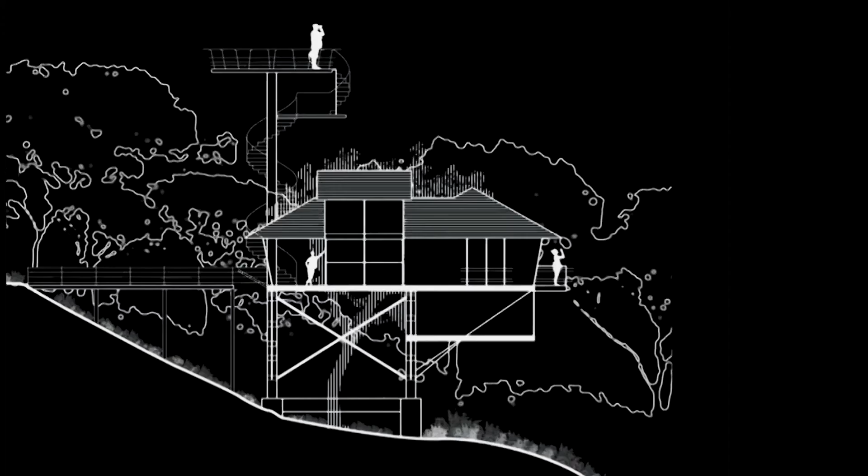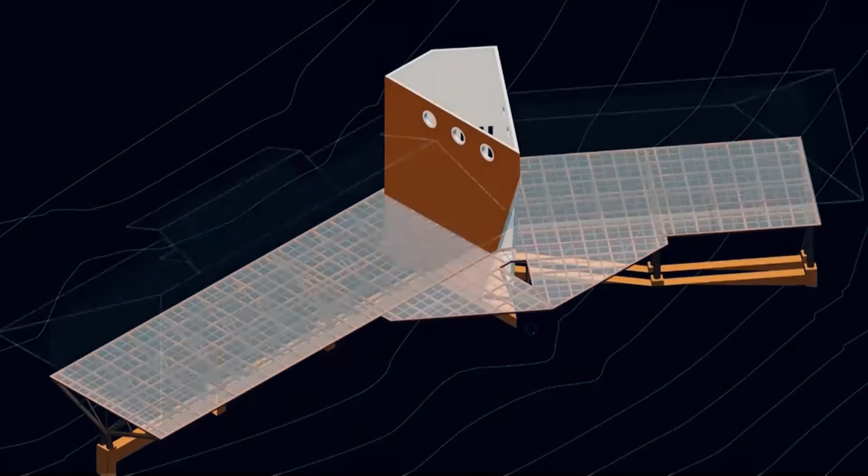What is constant and what is absolute in architecture is that we create spaces. His work has put emphasis on the process more than the outcome, and this process is inspired by the relationship between man and nature. Architect Shabbir Unwala has been practicing architecture and interior design for the last 31 years and went on to establish his own firm called Design Works in 1990. Among his many projects are the Stone House, the Waterfall House, and Machan in Lonavala.

Great. So I call it architecture of the mountains and on the mountains. So that's what I would call my today's subject. So when you're building on a mountain, what are the factors affecting buildings on hills? So you have geological factors, you have climatological factors, and you have natural hazard factors. So these are the three things that start affecting your building.

The geological factors: suppose a mountain is built out of just soil. So what happens? There could be a landslide. And if you follow some news, 15 years back, there was a village that got completely wiped out near Bhaja Caves because there was so much rainfall, and because people cut the trees, the soil becomes loose and then it slides down. In fact, I think around 3 years back, it happened in Kerala also. We had a similar problem. And a few years back, we had the same problem in Kedarnath. So those are the geological factors that start affecting what you build on a mountain, if you're not being careful about it.

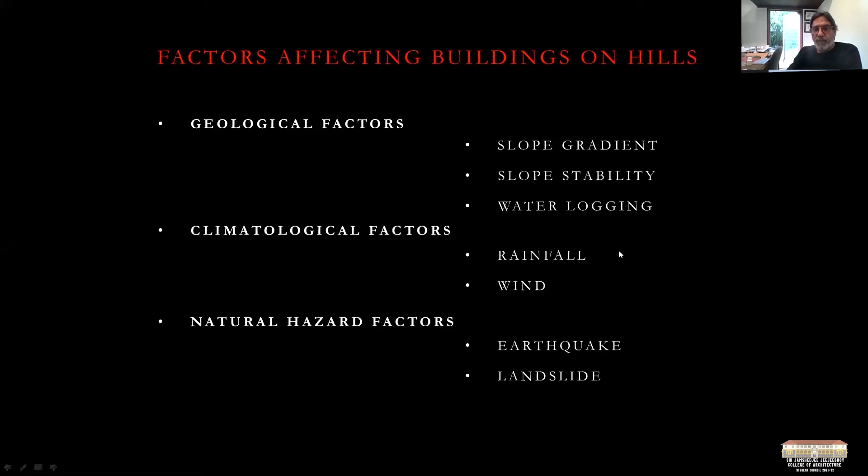Then there are climatological factors and natural hazard factors. So when you say geological factors, there's slope gradient, slope stability, and waterlogging. When you look at climatological factors, rainfall and wind, and natural hazard factors, earthquake and landslide. So these are the factors that start affecting your building. And if you're not being sensitive to it, then nature gives it back to you. And when it gives it back to you, it is really with its full fury that you feel it.

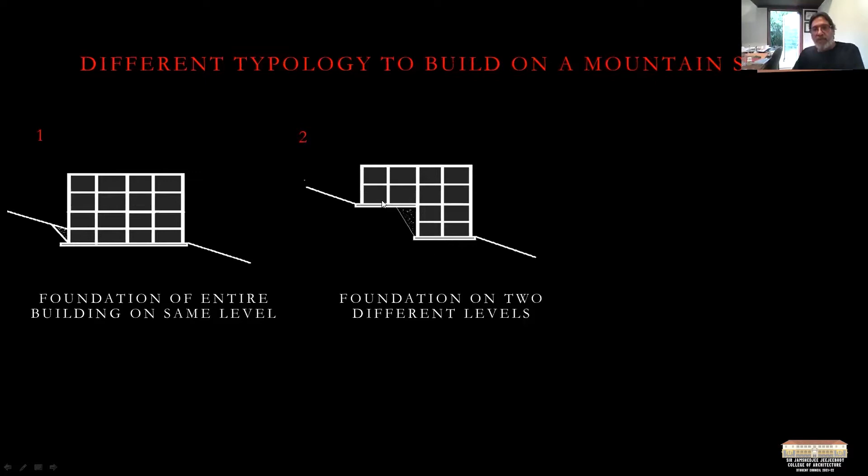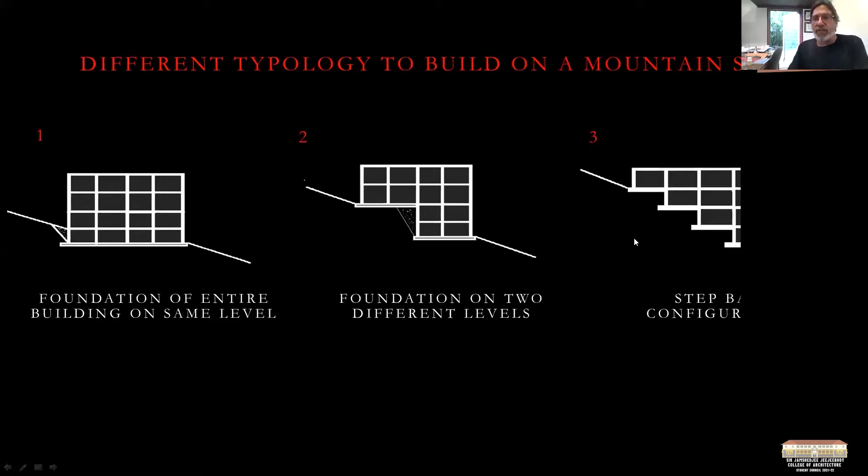There are different typologies built on a mountain slope. Suppose you found the entire building on the same level. Then you start cutting the mountain, make it a flat ground, and then you do your building. Or you can do something like this, where the building is on 2 levels. If your building is much bigger, you start putting it into 2 parts. Or it could be a step back configuration, depending on the gradients, the mountain, and the size of the buildings. So these are the different typologies people follow to build on a mountain.

Number 4 is step back and setback configuration. The other option that a lot of people do is create an artificial platform with retaining walls, and you put a building on it. Or parts of the building supported on stilts. You can see this is all on one level, but you have these very tall stilts that try to bring the building on the same level. It depends also on the functionality. If you need a large open hall on the same level, and you're not able to get it because of the slopes, then you start doing things like this.

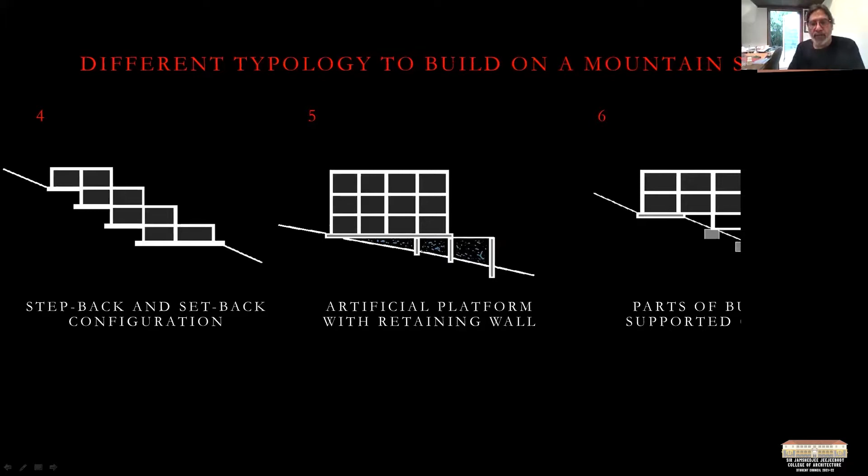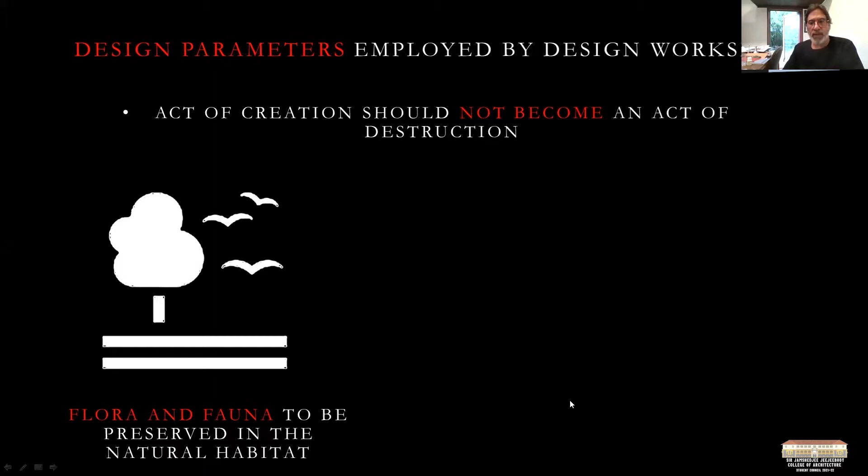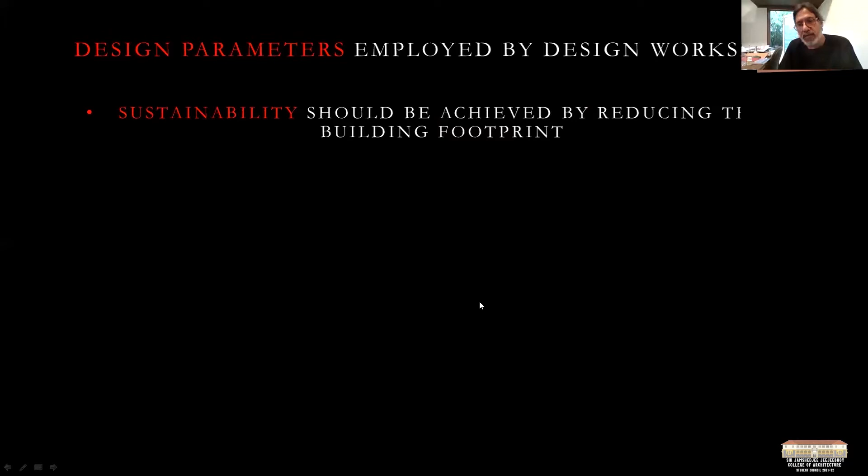So sustainability should be achieved by reducing the building footprint. Because when you reduce your building footprint, it's like a tree, that's the best example that one can think about in nature. Look at a tree. Look at the trunk of the tree. Look at the footprint and look at the crown of the tree. It's humongous. So how does a tree do that? And that has been an inspiration for me, that when you build it like a tree, so minimum footprint.

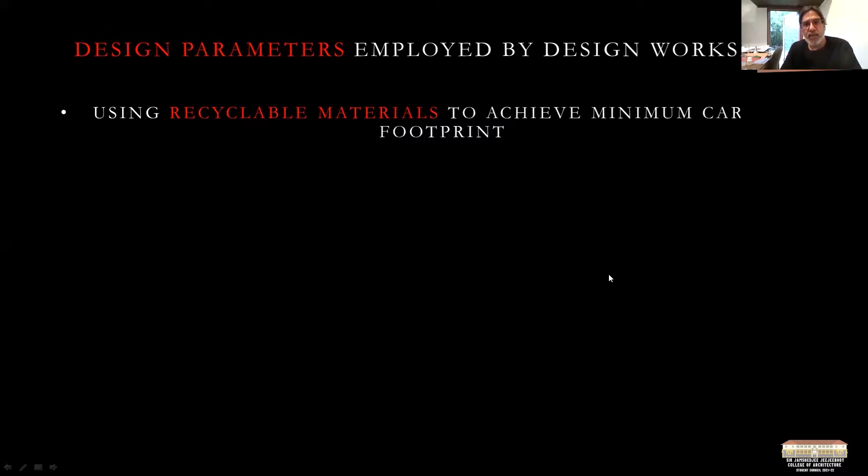Using recyclable materials to achieve minimum carbon footprint. Now, when one says this, one really means it. It's not a feel-good kind of a talk; one really is committed to how you use recyclable materials, or you use materials that can be recycled.

So one of the things that we do is recycle steel, reclaim wood, glass, cement fiber slabs. These are the kind of things that can be recycled. You have a Trekdeck sheeting that can be recycled. When you take an RCC building or a brick building, when you want to recycle, you do not get to recycle anything except the windows, a few things. But here, if your building is completely made out of recyclable material, then you really have a green building.

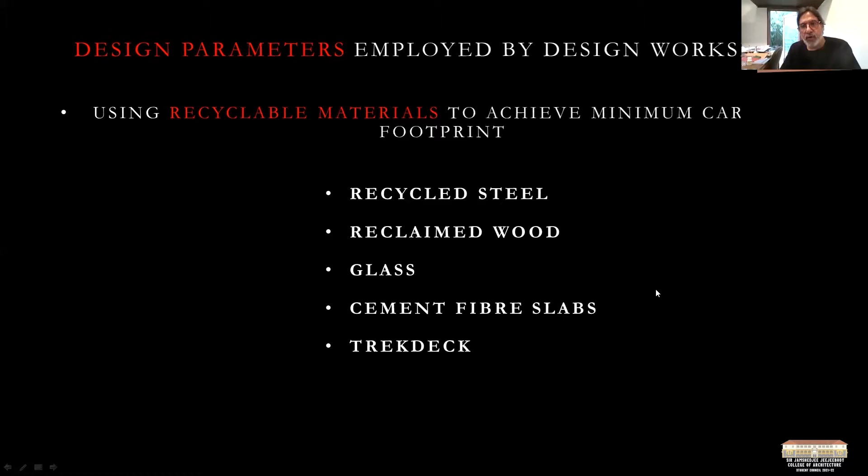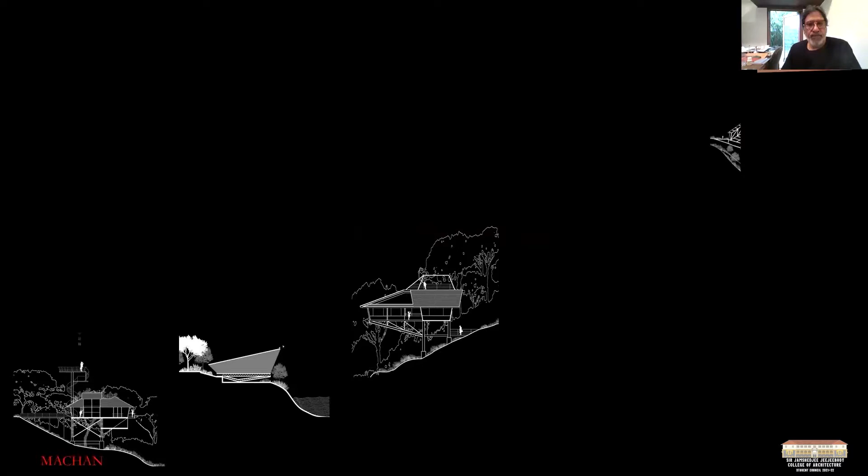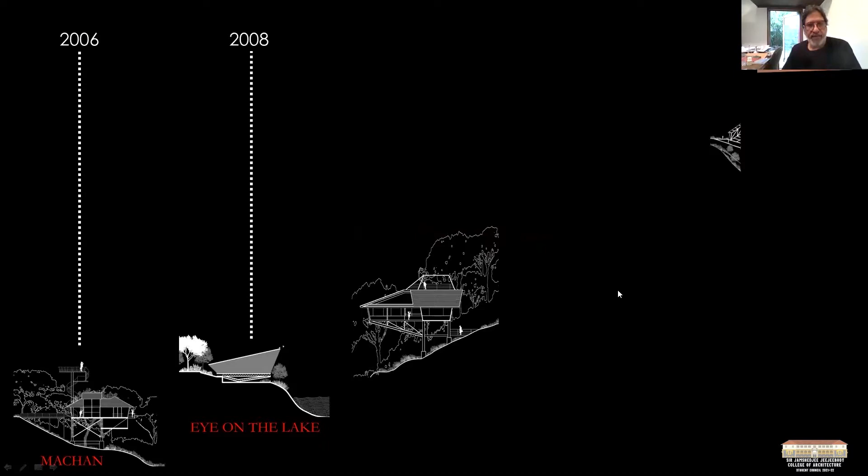So I'm going to share a few of our projects and show you how we have been employing the mantra that we spoke about in our projects. So we have a Machan, which was done in 2006. Then we have Eye on the Lake, the Glass House, 2014. This, we call it the Eagle's Nest. And then we have the Waterfall House that got completed in 2019.

And they're all on a very different kind of terrain. So Machan is built in a forest, and when I say forest, it's a real forest. It's like a rainforest on the Western Ghats. Eye on the Lake is bang on the lake, Khadakwasla in Pune. Glass House, we have done again in a forest in Nasik on Trimbakeshwar road. Eagle's Nest is in Pauna in Lonavala. And Waterfall House is in Karjat. In the Waterfall House, there is no land, there's only a waterfall. And we built it on a waterfall.

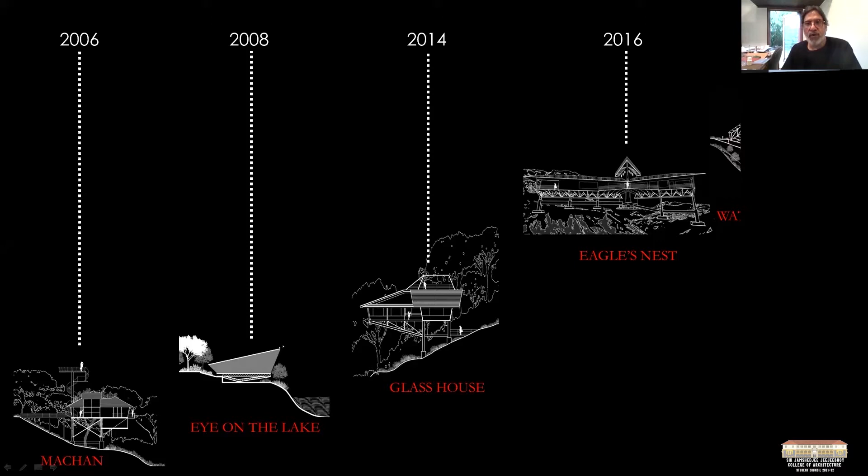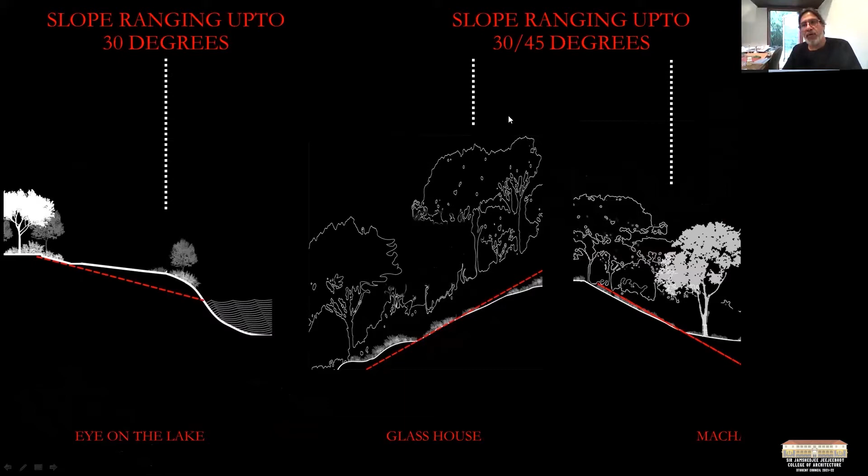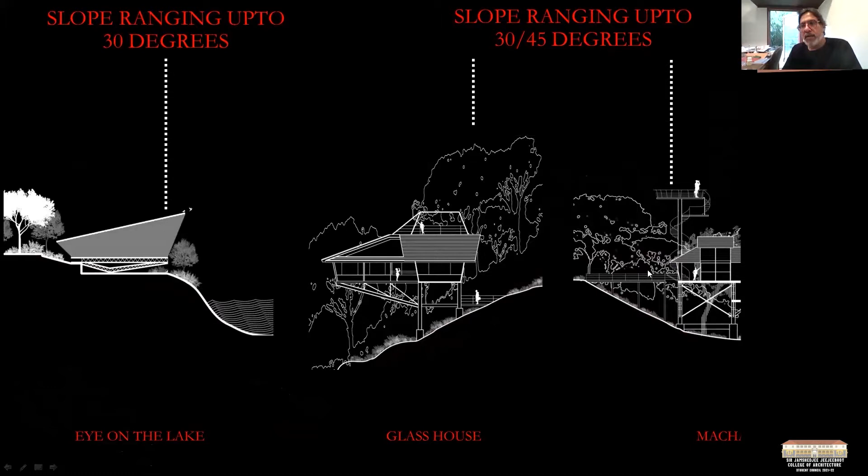We've been working on different kinds of slopes. So you look at 30 degrees, which is not very steep. Then slopes ranging from 30 to 45 degrees. On slopes of 30 degrees, we have done Eye on the Lake. On 30 to 45 degrees, the steep slopes, we have done Machan, and we have done the Glass House.

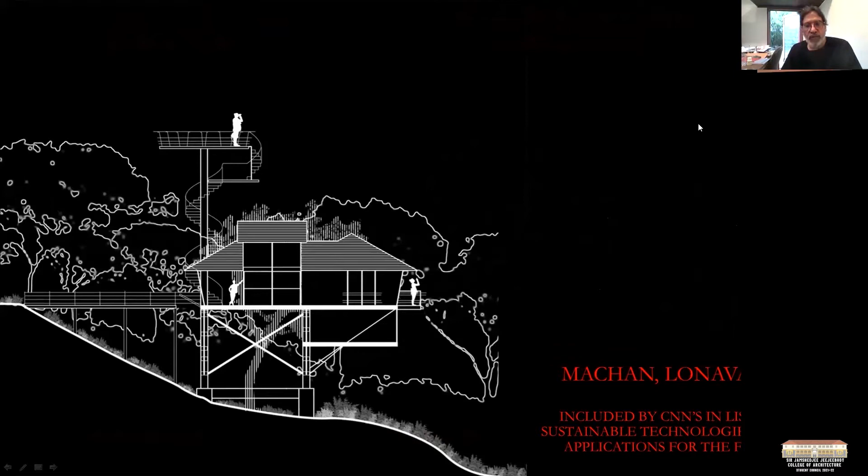So Machan is what we're going to start talking about. That's the first project that I would like to share. In fact, this project was taken by CNN in 2007 as one of 23 ideas for the sustainable future. And this was the only project that CNN selected from India. The rest were from all around the world, from Europe to America to the Far East to Africa. They have taken different ideas of what the future holds for us and how we can build in a way that is very sustainable.

So I'm going to talk about the story of Machan and the fig tree. So when the client approached us, he wanted to make a house for himself.

He kind of retired and he had this property that he had been nurturing for, and I'm talking 2006, he'd been nurturing it for like 17 years then. Now it's almost 30 years. And when he had got the property, there was not a single tree. Can you imagine 25 acres of barren piece of land? Because the locals, the tribals, would cut the trees for the firewood.

So the whole land had like 3 or 4 feet of stubs of trees and nothing else. So the only thing that he did was that he just fenced the property. He stopped people from coming inside and he let the trees grow. Nature needs a little bit of hand holding, and nature is extremely generous and extremely forgiving. And within 17 years, the whole forest had grown.

So when he came to me, he said that he wanted to make it on a flat ground. He never thought about a tree house. But I said, you have such a beautiful forest. Why do you want to build it on a flat ground? So he said, what do you suggest? I said, let's make a tree house. So he said, give me a week to think about it.

But Mr. Huja, the owner, told me, no cutting trees, no cutting a single branch. And I said, that's fantastic, because he's an extremely sensitive person. So as I said, my inspiration is a tree. A tree is nothing but an inverted pyramid. If you analyze a tree, it's an inverted pyramid. So I said, let's make a house like a tree.

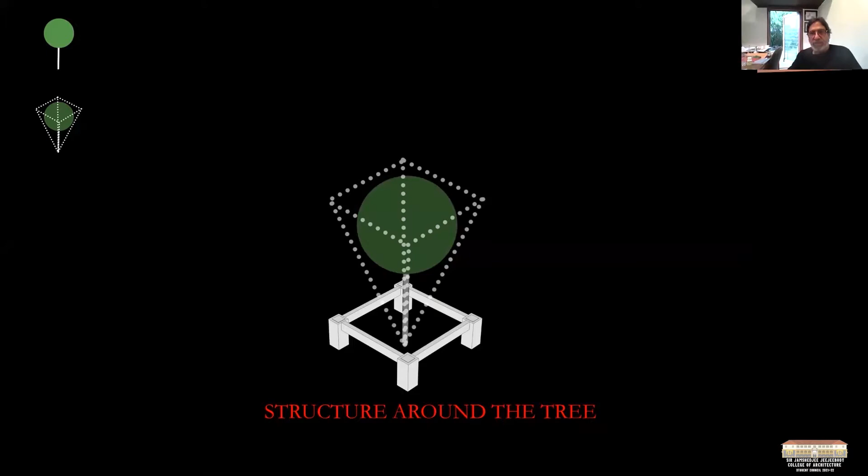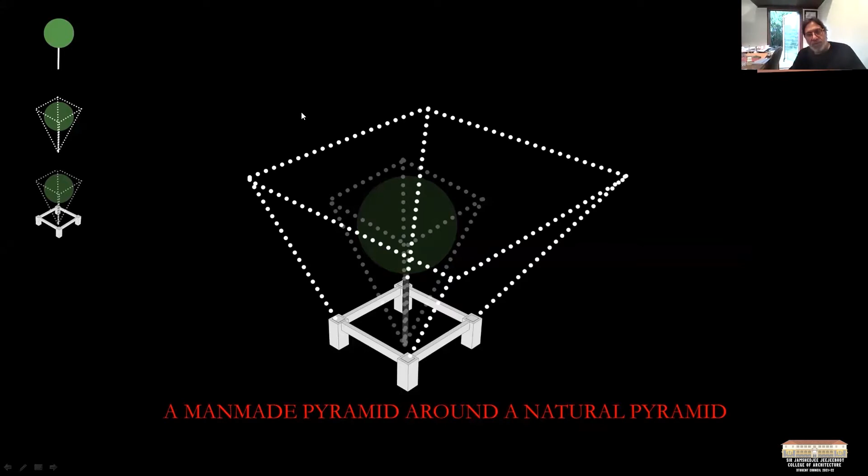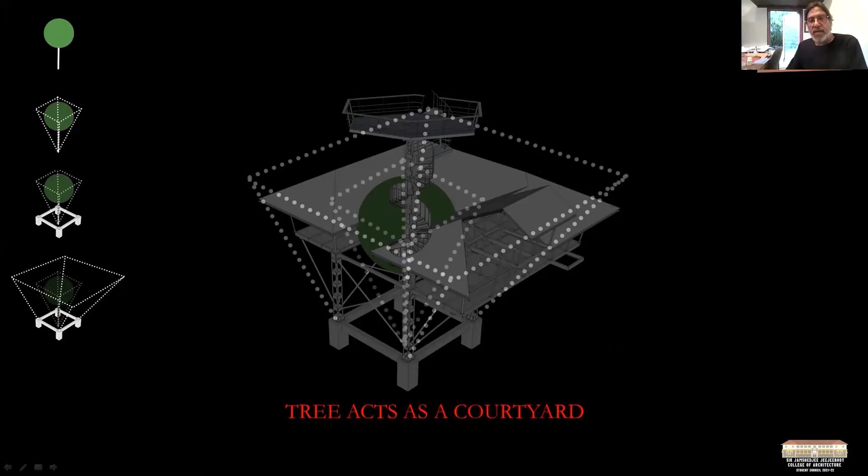So you have 4 pillars and the tree grows and you build it around the tree. So the tree becomes the heart of the house. You can see in the slides, the first is the inverted pyramid, the tree in the center, and the whole house happens around it. It's like a C-shaped plan. The floor of the Machan is 45 feet from the lowest point. And what we call the crow's nest is 75 feet from the ground.

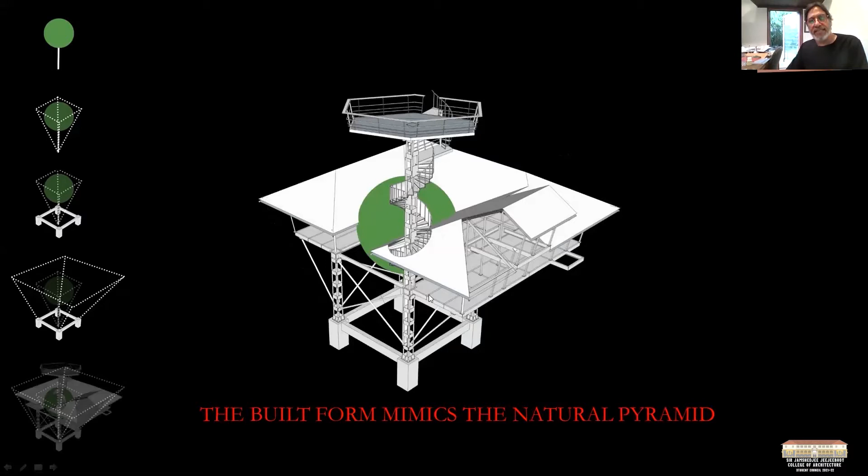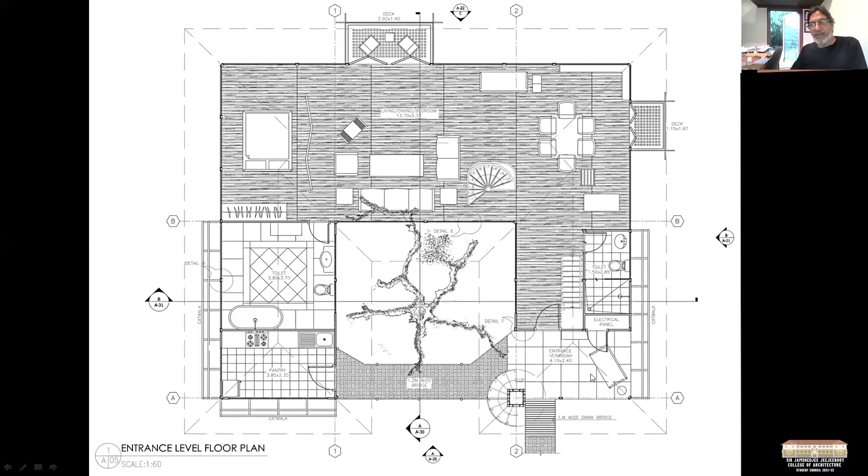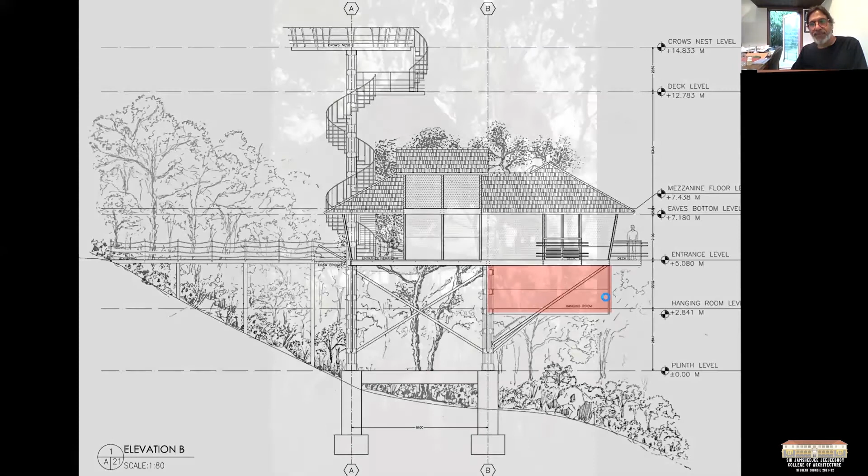So you can see from the lowest point, it goes up to 45 feet. We made this out of recycled steel. We didn't buy virgin steel. The flooring is wood, and wherever the bathrooms are, we just put slabs of stone. The walls are mostly glass, but wherever there's a partition wall, we used stones kept vertically. The roof is Mangalore tiles. So there's no RCC; it's what we call a completely dry construction.

This is a bridge. This is a ramp that you see. Can you see the arrow? That's the ramp that you come up from. This is a bridge that connects to the pantry. And the tree is right in the center. You can see the glass of the living room. Now you can see the tree going through the center, and the house happens around it. You can also see the slabs of stone. So the flooring is just slabs of stone, and that's good enough.

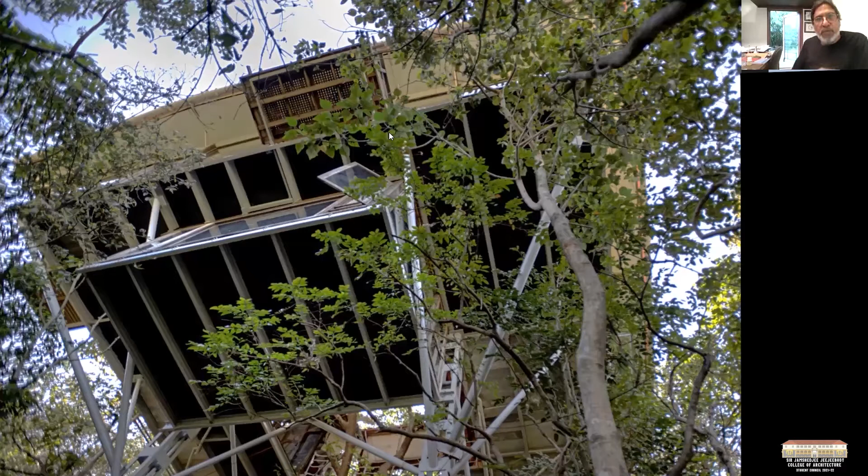And on this balcony, you can see the flooring. That is a ship deck. Ships are made out of steel, so to walk on them, they put ship decking wood, and it has cutouts. So when you sit over there, you can see the forest floor. And again, it's a recycled material.

So that's a ramp coming up. You can see this wooden thing. That's a drawbridge. So in the evening, you can just close it. You can see this cable over there. It's just like a London Bridge. You can just close this thing so nobody can get inside. Yeah, this is a slide that you can see it's going up.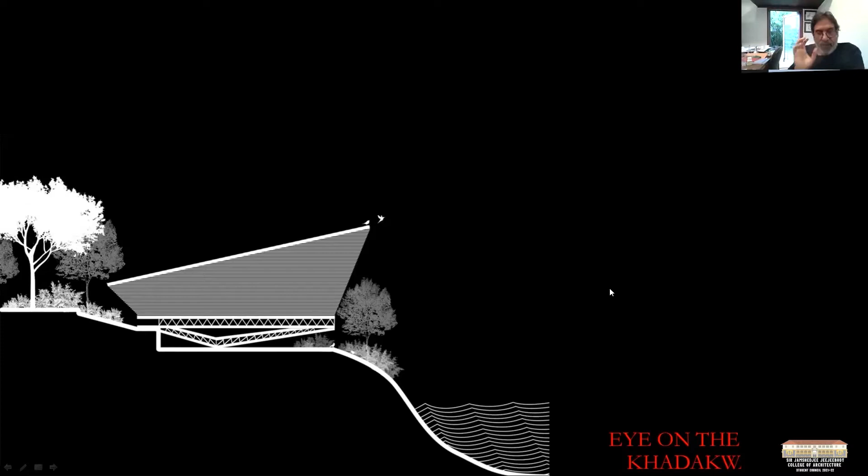And the other thing about this property was it was beautiful on all four sides. So now your main focus is your lake, but you do not want to miss out on the sides of it. So how do you do that? So you can see this. This is a roof plan with the lake practically touching the property, but there's a drop. So it's just like a bird sitting on two legs. So what we decided was your main focus is the lake, but we will have glass all around and give the slats. So that becomes a secondary view. The primary view is your lake, and the secondary view is the sides of the property.

I'm quite fascinated by how you enter a building, because there are many ways of doing it. And one of the things that I found is a kind of transition, like in the Machan also, you saw the ramp going up. It's like a ship ramp, when you go to a ship, you have these ramps. Here also what I decided was to make a ramp over here, so that you're going from outside to inside, and that's a bridge. So the bridge plays a very important part. So you can see the vista for miles together.

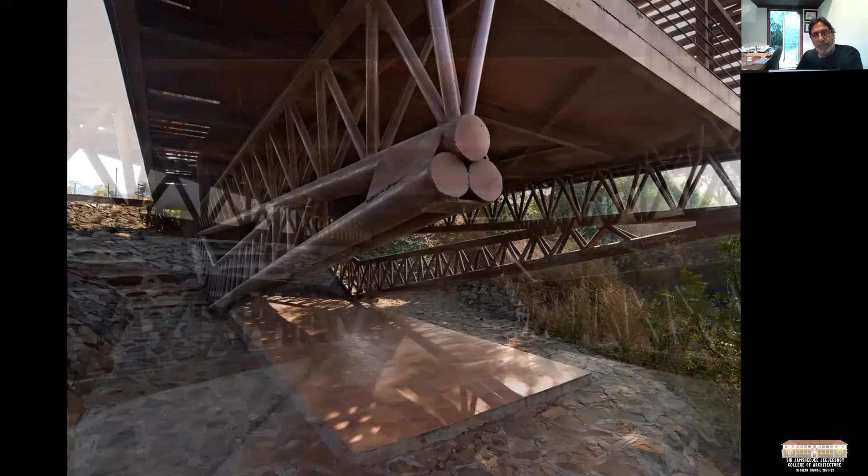So this is where you enter from. So I just continued the same language, the wood, you can see these slats, they just become part of it. So you don't change the language, you just change the material. So this is a catwalk, because even in Machan, what I did was give them a catwalk. You need to clean the glass. How do you clean it? You do not create a problem that can't be resolved. So everywhere what we try is give the catwalk, because when you give such large glasses, you need them to be clean. So this is the inside.

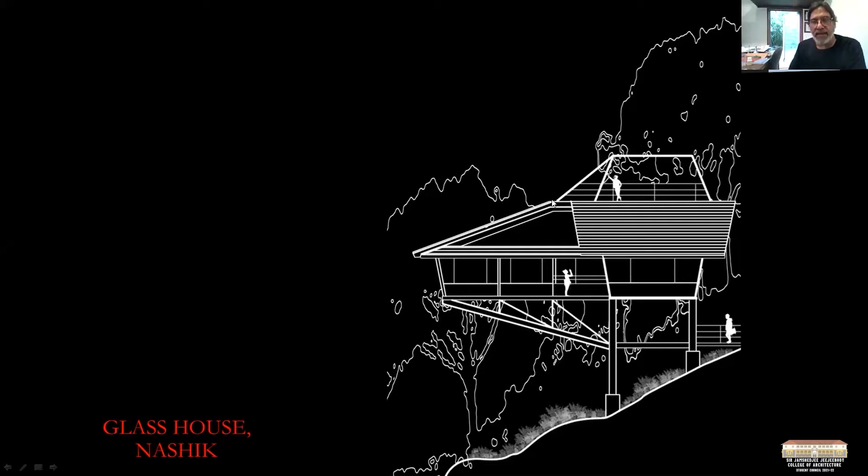But what I tried doing in this is, I took part of the load of the roof. The roof is suspended. So you have this truss. The roof goes at the same angle, and then from the top it is suspended.

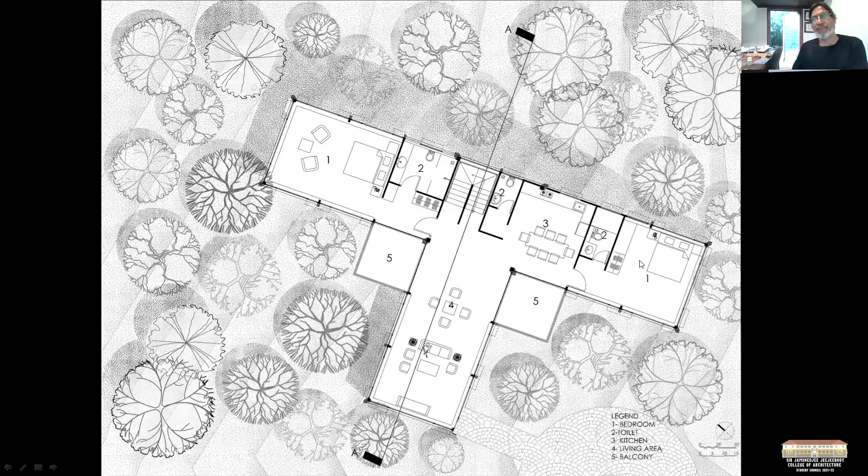So you can see the context of this. This whole land, the whole mountain and the forest, is a government forest. So this is like the last privately held land. And this forest continues up to Gangapur Dam. If somebody is here from Nashik, they will know what I'm talking about. So now you see this.

So you enter over here, and then there's a staircase that takes you up to the main space. They all open into little balconies. Again, you can see a catwalk. Again, you will see that all my glass is sloping outside.

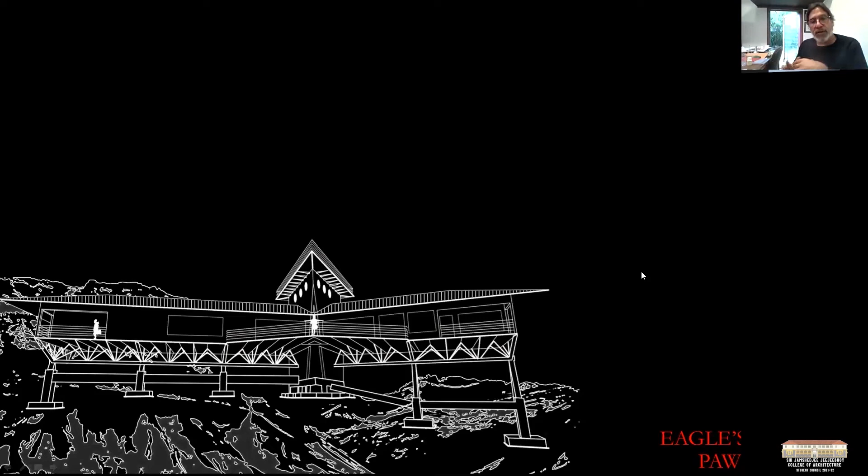Okay, now we will go to this house in Pawna. This is again a very beautiful piece of land. In fact, this property in Pawna is pretty big. It's like a boomerang. If you look at it on Google Earth, you'll realize it's a boomerang. There are no backwaters over here. This is right where you get a maximum view of the lake. And this is a house that we built.

So again, the whole principle is that you don't cut and you don't fill, you do not destroy the flora and the fauna. Not only that, we do not even want to touch the streams that are flowing underneath the surface. So we don't want to do any harm. So again, with a minimum of 4 or 5 columns, we designed the whole house, and it's a pretty big house.

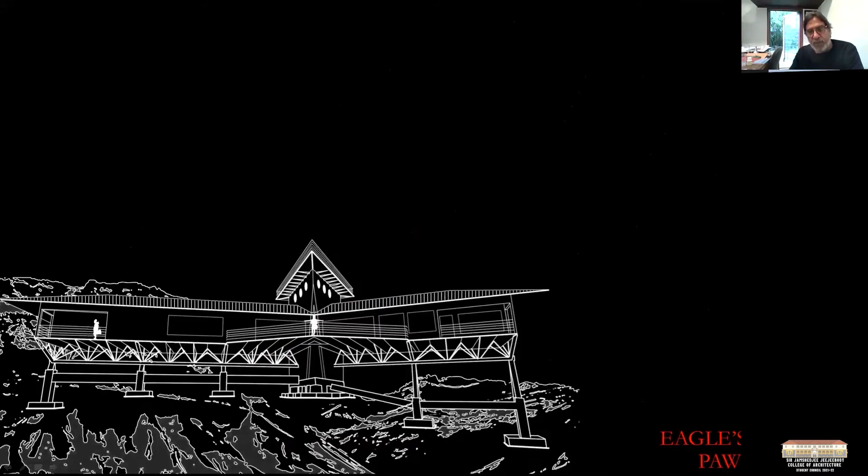So the height would go from 6 feet to 35 feet. The maximum height at this corner was 35 feet, and at this point it's 6 feet. So this is the structure. Everything was built in a factory, brought over here and assembled.

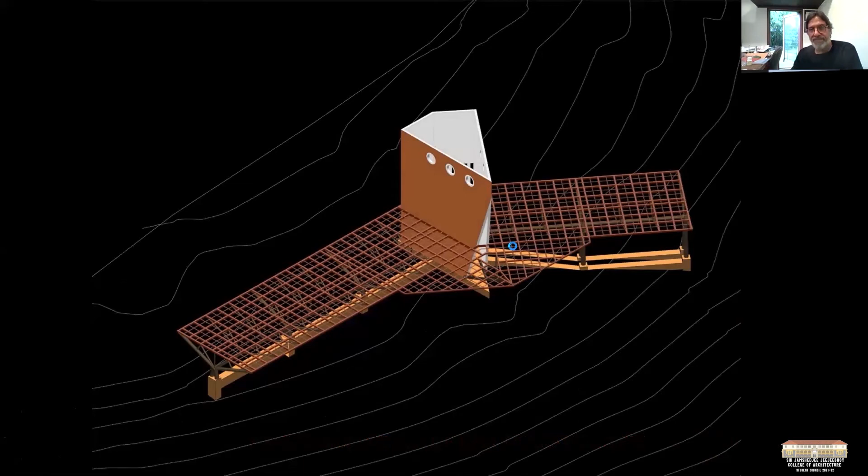So this is the top, what we call the eagle's nest. You can go up over there and see it. The building has been turned around in a way to maximize the view, because from this wing, you can see the lake with islands. And on this side, you can see the lake going right up to Hotel Silim. So you skew the building a little bit and you can maximize the view.

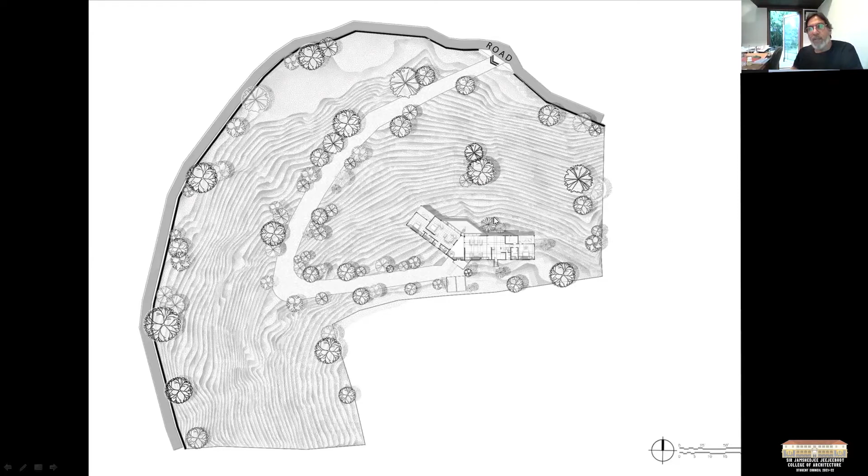So again, the entry is through a ramp. You come into the central vestibule foyer, which is double height. Then number 3 is your living room. 5 is your kitchen. Outside the kitchen is the dining. And 8 is the master bedroom.

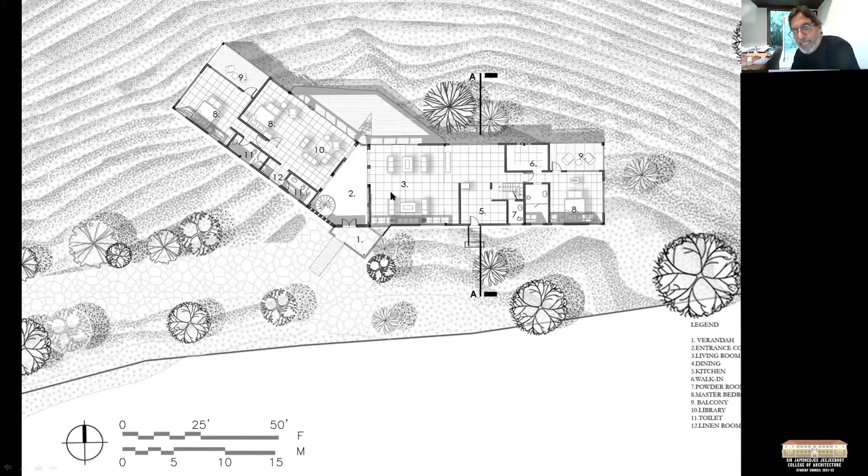Again, from the foyer, you go on the left-hand side. You get a library, games room, bedroom, and again a master bedroom. When you go down, you come into the gym. And when you go up, you come to the eagle's nest. So these are the sections. So this is the approach.

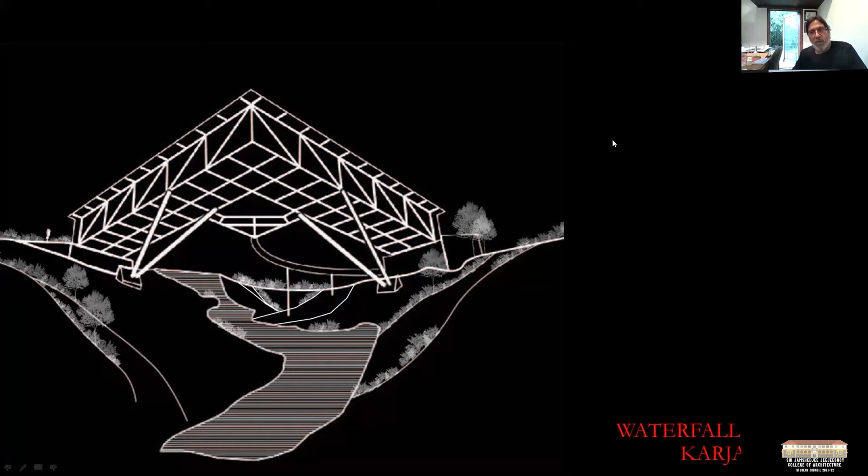Okay, so you can see this pizza slice. Yeah. You enter from here. And these contours, by the time you go on the top, is a 30-meter difference. When you say 30 meter, it's 100 feet. And there's a waterfall that starts from here and goes down. So the challenge was how do you build on a... I mean, the most iconic building of the 20th century is Falling Water. Yeah. And then you say, okay, here's a chance to build on a waterfall. So how do you crack the design?

So I thought that it is much more exciting to see the water coming towards you. I had gone to Niagara Falls, and they have this boat that takes you right where the waterfall comes down. And then you realize the power of water. It was deafening and it was scary. So I said, this is a seasonal waterfall, but when it starts, my God, the quantum of water that flows through this thing. So I said, fantastic, I would like to see the water at eye level.

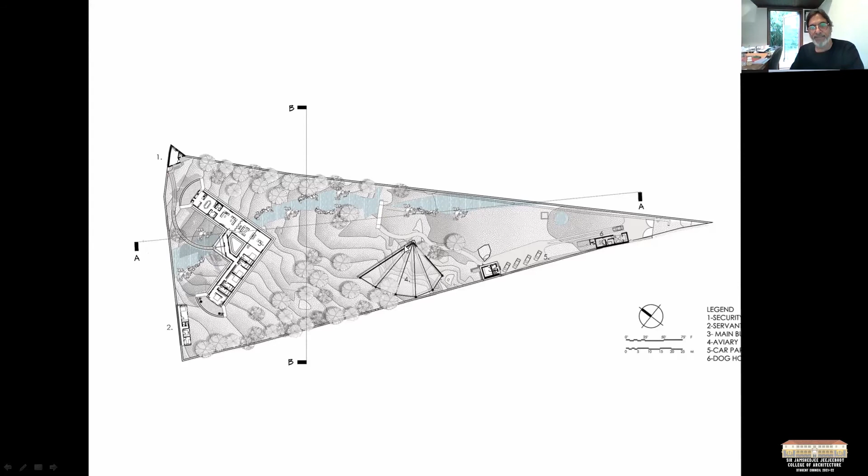In Falling Water, you see the water going from underneath it. You do not experience it coming towards you. So the whole idea was that you are at eye level with the waterfall, and then it passes from underneath you and goes. And because it forms kind of a valley, the house is almost like a bridge. And he loves birds, so this is an aviary that we designed for him. You see the section. So it's basically on 2 points. It's a house of about 4,000 square feet supported on just 2 points.

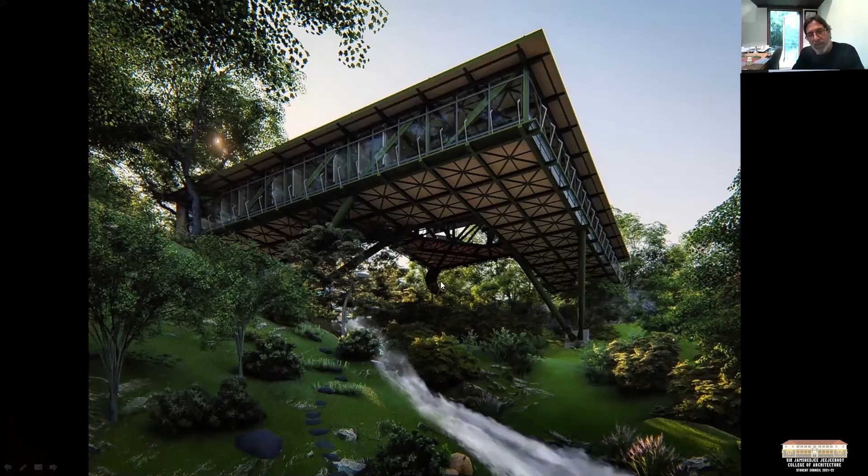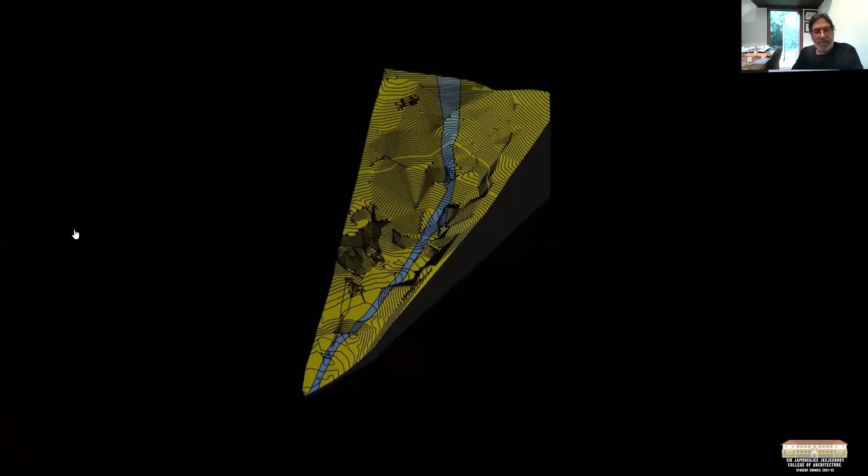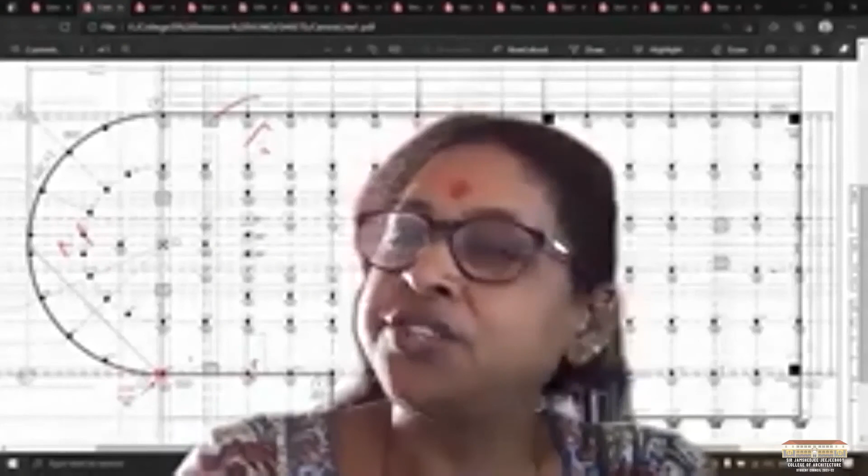And steel specifically is a very nice material; it can be slender and strong, so you can use it very nicely. Absolutely. Unfortunately in India, we have not been able to explore steel as a material. I hope more and more people start using it and they will realize the beauty of this material. And again, it's sustainable also, totally recyclable. Exactly, completely. The perfect material for modern days. Absolutely.

Hello, Shabbir bhai. Can you hear me? Sorry. Yeah, I can hear you. Shabbir bhai, I want to,

it is impossible to find words to thank you. I love every drawing that you showed, every section drawing, that actually has a great impact on design. I like the way you showed a board in the form of a drawing and then actually on the hill, and then you took us inside it. I think that's a great experience. You have actually been successful in converting your concepts from the drawing board to the site.